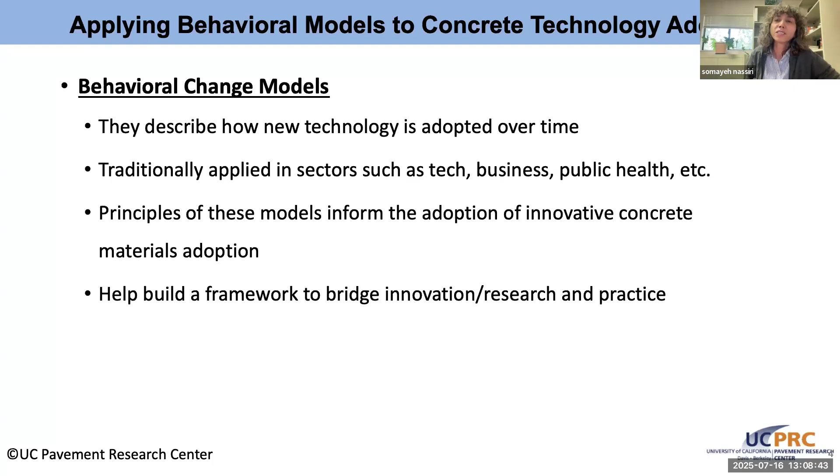As we've been exploring this idea and facing these questions from a broad range of stakeholders, from the producers, from the contractors, and from the state DOTs, why doesn't the change happen already? Why does it take so long? We looked at what is available in social sciences, what psychologists say, what kind of models are out there. I found a few behavioral change models that are applicable to the concrete industry and construction industry, though they've generally been used for tech, business, public health, a variety of sectors, but generally within the tech industry they're very common. We can learn some aspects from their principles.

And help us build that risk management framework. So the first model that I want to introduce to you, and a lot of you may have already seen this, is called the Diffusion of Innovation model.

So this model breaks down the entire population, as you can see on the screen, into fragments of population, and describes how various fragments of population will take on to a change.

What you can see, that tiny 2.5%, those are the innovators who we want to engage first. Those are for us to translate back to the concrete sector - maybe the firms that are willing to take the risk, or have the resources or the culture already, that can take on big projects and absorb the failure if there is any. I would give an example of maybe the owner of Burj Khalifa, or whoever set out to build the tallest skyscraper in the world and take on that risk.

After that 2.5%, we want to engage the larger early adopters. And then what you see on the screen, there is that chasm - that gap that technology or the new material or any innovation has to cross, has to bridge, to be able to then make it to a larger population, 34%.

As I've been presenting this, and I see my friend Mike Smith here from CEMEX also, we've been identifying a second chasm. So we would have a modification to the authors of this model, developers of this model, to introduce one more chasm there that the technology will have to bridge and cross to make it to the late majority. And now the technology's made it through the majority of the population.

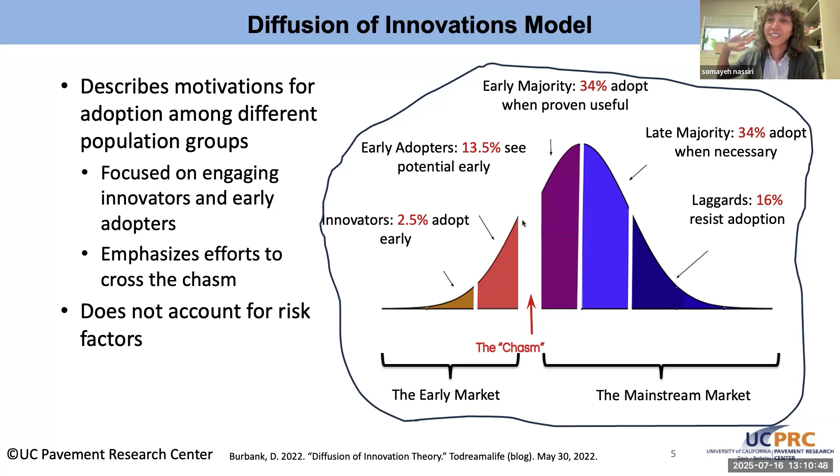I was presenting this framework to another group, and somebody brought up a really good point - they've been working with the school district, and they are unwilling to take on coal fly ash in their concrete mixes. That reminded me that there is always a small portion, 16% of the population, that just would not take on to that change. And that is okay - that's just the cross section of the population.

So the next model that I found quite relevant to how we perceive change, or what are the barriers that we see, or what are the different steps for why or why not an agency may adopt that change, that particular technology.

This model, UTAUT - you can see the reference at the bottom if you want to read more about it - but it's summarized in this flowchart. Let's start at the top.

The first item is, from a user standpoint, or a firm, or a DOT agency - how would this impact my job? Is this going to be a failure on my record? Is this going to damage my reputation, or even worse, am I going to lose my license for this? Or is my firm going to see some financial losses, lawsuits, and things like that?

And then the second level is effort expectancy. For us in the concrete industry, this can translate to - okay, this material, how easy or how difficult is it to take on? Is it compatible with the admixtures that I already have on hand? Do I need an extra silo? Do I need to make changes to my regular mixing and batching? That would be an example.

Also, what makes it a lot easier for material to be taken on is if there is already a path to standardization or to being accepted as an approved material list. If the path is there already, and you know what tests need to be done, then that effort expectancy goes down drastically.

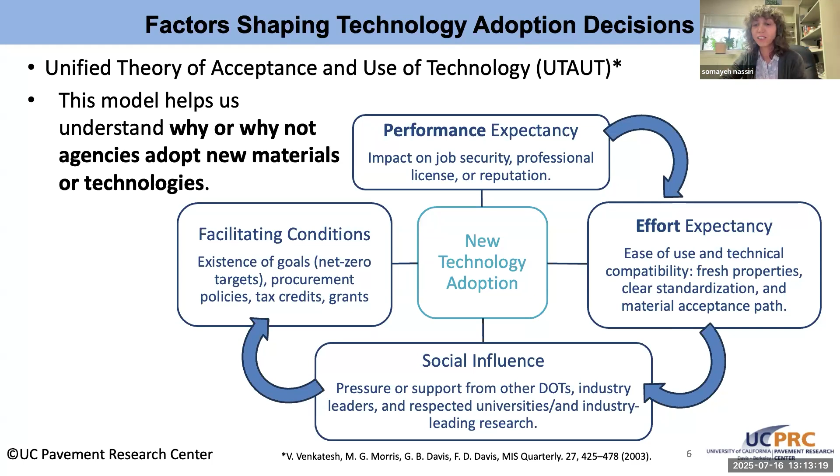And then finally, at the end, facilitating conditions. I translated that as policies - governmental or agency policies like net zero goals that we had, some of the procurement policies that were coming out, tax credits, grants, and funding opportunities. So all of these coming together, I thought that model was a really good representation of some of the barriers and some of the things that may slow that change.

Another model that I thought was interesting was addressing the question within larger firms and even public agencies, those who are in charge of our public infrastructure, like DOTs or federal highways. How could they embrace change?

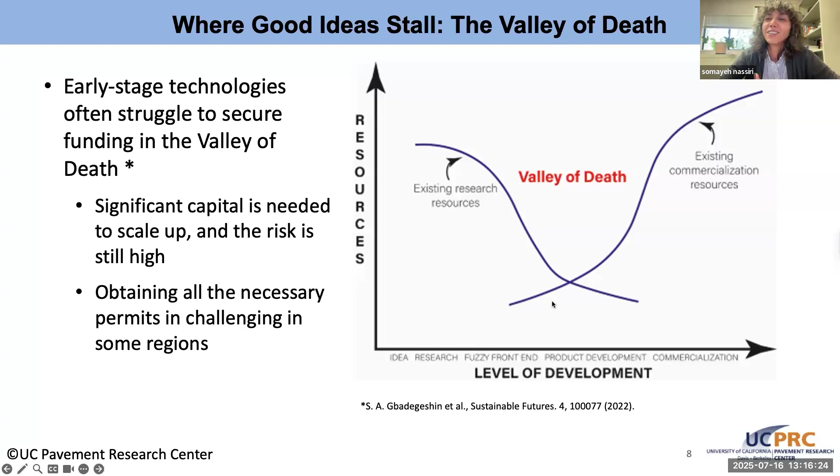What research shows is that somewhere in the middle, all the resources get challenging and sparse, and they call that the valley of death. That's essentially trying to say that is where good ideas could go and stall, ideas can go die.

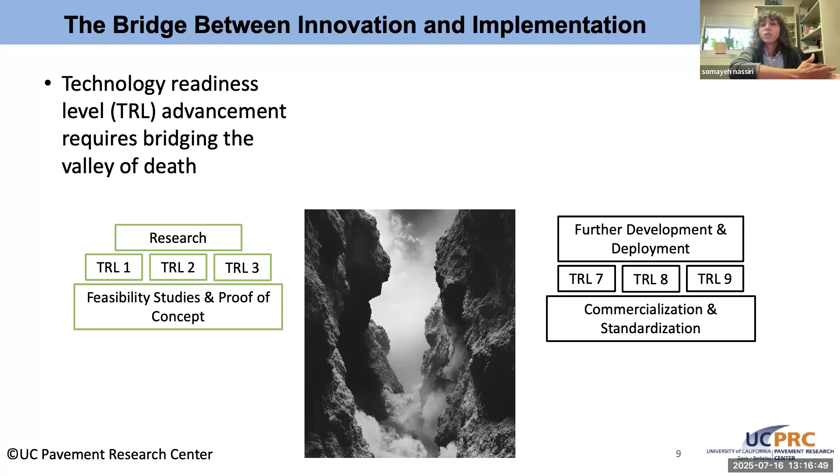The idea here is that a technology would start, and this comes from NASA's technology readiness level, TRL, advancing all the way from 1, early stage, all the way to 9, which is deployment and commercialization and standard practice. So what we're looking for really here is a bridge.

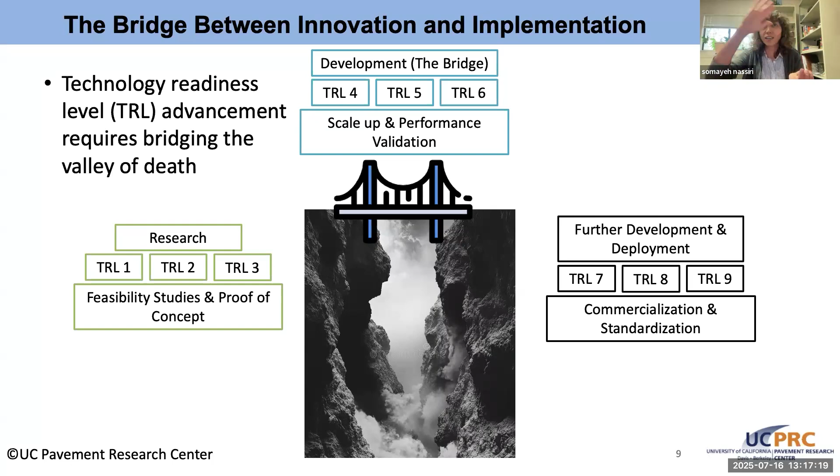We're looking for the bridge to be able to help support development and provide evaluation, validation, feedback, and performance validation, because there are challenges here in the middle that need to be bridged, and those could be funding, scaling up, getting permits, and getting over that chasm to make it all the way to here.

That background brings me to this framework that we want to talk about today, and we refer to it as Lab2Slab2Practice. This framework is designed to help overcome the two valleys of death that we've been talking about, the two large valleys to overcome.

The way we have framed it is really focused right now on evaluating supplementary cementitious materials. This has been work supported by Caltrans, and we've been focused on finding alternative supplementary cementitious materials to coal fly ash and slag. But it's a framework that can be applied to any new materials or any new technology that wants to make it to the sector.

So considering evaluation of SCM, or supplementary cementitious materials, we start off by basic characterization. This includes mineral phases, oxide composition, particle size, thermal activation if anything needed, XRD, XRF, getting all of the pozzolanic reactivity, and then doing cube testing, and then if everything checks out, we advance to a larger scale.

So you can watch my hand. It's literally, we're going from having a few grams of the material, going to maybe 1 kg of the material, and then we're going up to maybe having a bucket of the material.

So we're scaling up. Early on, we want to check environmental claims, and we use this as a screening tool to weed out the ones where the claims don't make sense, check out cost, scalability, and whether we can establish a supply chain for this new material. Does everything check out? If everything checks out in this early investigation, then we want to move things forward.

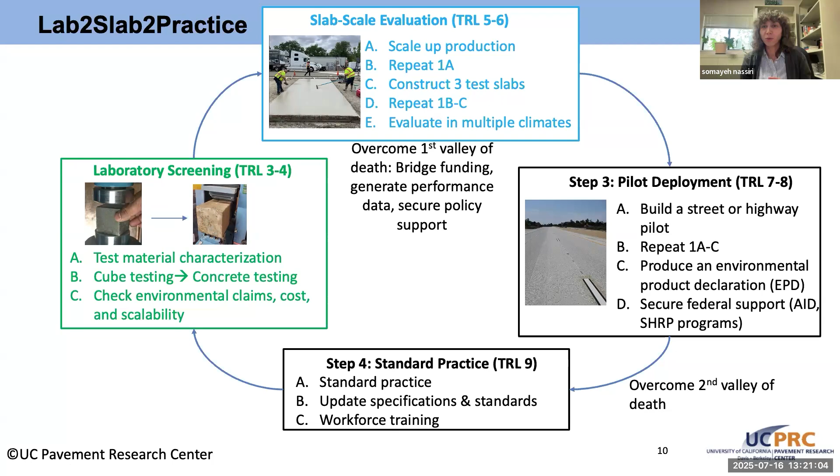So I presented the framework in a theoretical manner so far, and I'd like to give you some examples as we go through this. I'll come back and touch on a few programs that have also implemented those. So we're going to go through an example implementation of this framework.

I'm going to use natural pozzolans as an example. I don't know how many of you are familiar with pozzolans, but these go back to ancient times, to Roman times in fact, when they used to make concrete or concrete-like substances with volcanic tuff. They called it pozzolana, and that's where the whole story began. We still have standing structures from that time that have withstood the test of time and proven durability.

Coming to modern construction, we've also used pozzolans across California, where we've had pumice deposits. It was discovered - today we call them Caltrans, but back then the highway agency employee Stanton demonstrated for the first time that pozzolans in California can mitigate alkali silica reaction, and they're a very good additive for concrete. We have a lot of public heavy civil infrastructure, like dams in California and the western area of the country, that have pozzolans and pumice-type materials in them.

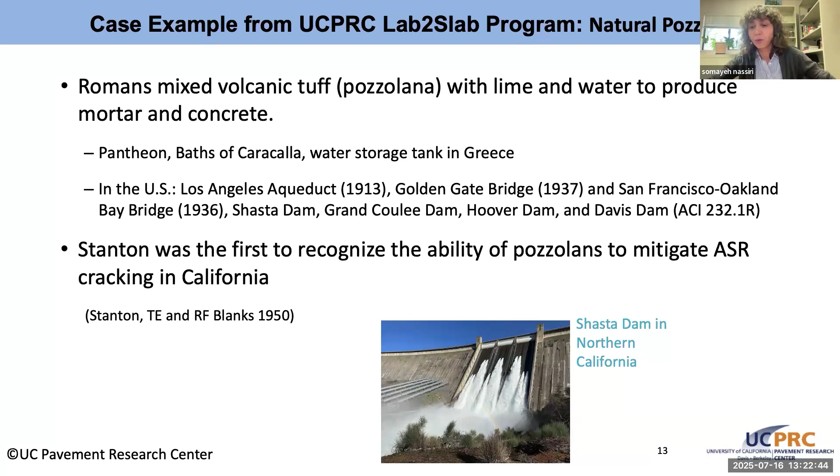So now we want to go back and see - look, we're low on coal fly ash, we're low on slag potentially, until we want to diversify. We want to have various types of additives, supplementary cementitious materials, to use in concrete.

So if we go through that framework we talked about, the first step, if you remember, was characterization at the laboratory scale, needing just a few grams of the material. As it is with the binder portion of the concrete, we need that surface area. A lot of it comes down to activation, whether mechanical or thermal activation, and the characterization has to be done in terms of mineral phases, surface area, fineness, all of those.

And then what we put a lot of focus on is the pozzolanic or latent hydraulic reactivity of the material. These are tests that can be done on a very, very small amount of the material, yet give us a significant amount of information to screen these materials early on. We can do small scale cube testing to look at strength, but also look at water demand, which is a very important aspect of these additives.

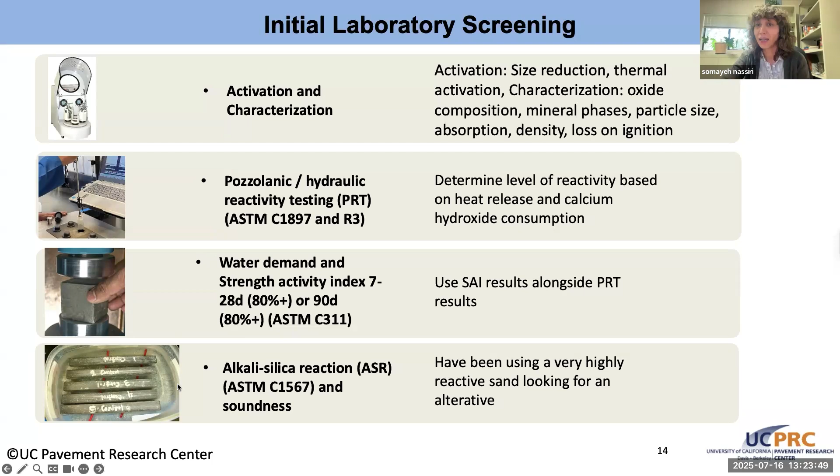As I go through the presentation, I cherry picked one of the first materials that we put through this whole feedback cycle. This material was produced for Purebase. They produce metakaolin mixed with a silica type SCM. It is produced locally here in California, in Ione, California.

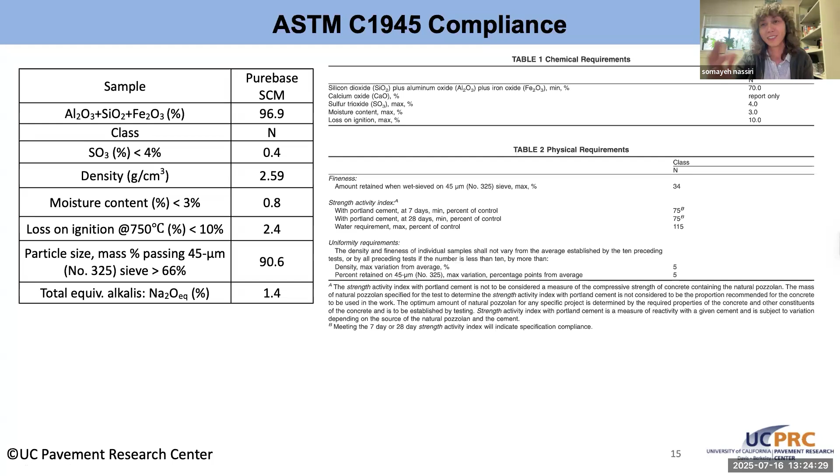Everything started, like I said, with the characterization of the essential oxides, looking at density, moisture content, any carbon or organic matter, particle size, everything checked out. So we did the first level of screening, looking at alkalis and all of that, and progressed to looking at the results of pozzolanic reactivity.

What we really like to look at in this graph: we place a little bit of the material in an alkaline solution and look at how much heat is released in isothermal calorimetry over 7 days, and that's what you see on the y-axis. Then we also take that paste out after 7 days, and we measure how much calcium hydroxide is consumed in that sample by thermogravimetric analysis. We plot the two together.

We've tested so many materials at this point that we've come up with boundaries and boxes for how to label the material. We've also checked that with some of the work available in the literature, and the boxes kind of match up. So you can see that Purebase material we're using as an example today falls in this middle area, which we like the material to fall in, pozzolanic.

What we call them less reactive versus this area is where we get a lot of heat, and those are the super uber reactive materials. We're not necessarily looking for overachievers. We're looking generally for materials to be in this area.

And then some of the other materials may be latent hydraulic, which fall in these other boxes. This box down here is our reference for an inert material, which is just ground up quartz. So these are the materials that are not pozzolanic and would not yield any of those additional benefits that we get from pozzolans, like additional calcium silicate hydrate or calcium silica aluminate hydrate, and all of those things that add durability to the concrete.

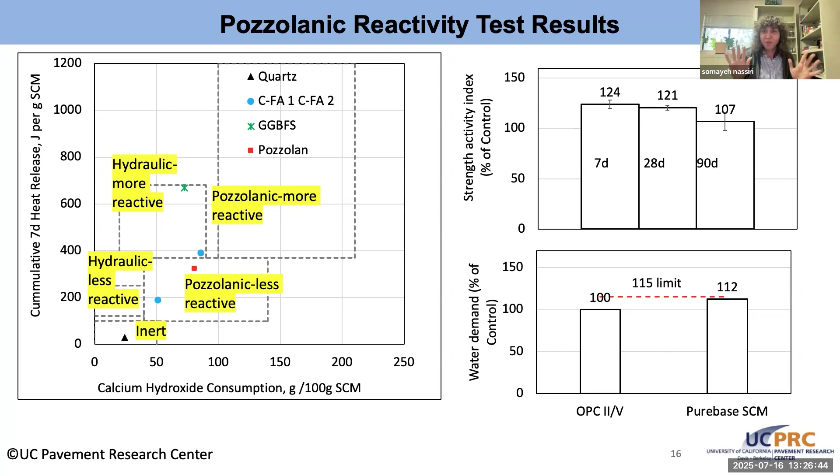We also keep an eye on water demand, making sure that all of those capillary pores that want to suck water from the concrete, we fill them up, and the material is happy with the amount of water that it has received, and that we can incorporate it into concrete.

Foam index is something that... okay, so then we finished that first round of the screening, and everything checks out, then now we are scaling up already from about a bucket or a couple of buckets of the materials.

So we are working with the supplier at this point to scale up with them, and we're trial batching concrete at this point. So for the materials that are a little higher in carbon content or organic matter, we want to look at compatibility with air entraining admixtures for freeze-thaw durability.

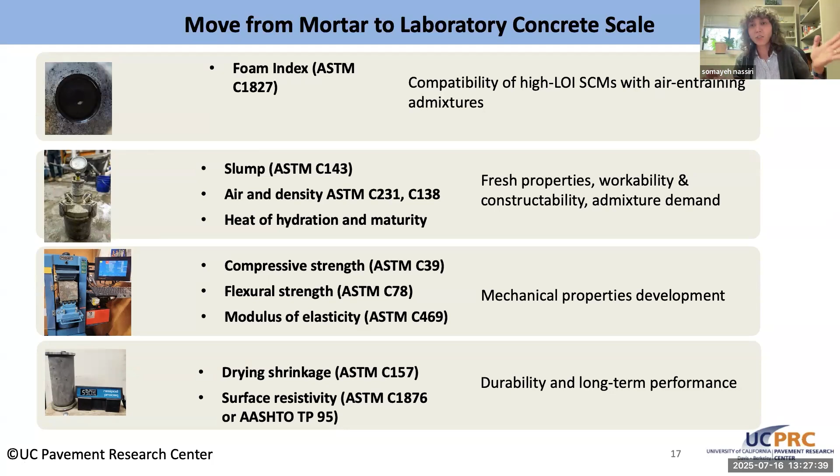We'll look at a full range of fresh properties, hardened properties, and also some indicators for durability. Drying shrinkage is really important for us in pavement applications, so we always keep an eye on that. Surface or bulk resistivity testing is something we've been using as a proxy for durability evaluation. It's not a direct evaluation method, but it's a proxy.

Back to our example case material here being Purebase, we use a control. Here's our trial batching, this is our concrete mix design. We look at admixture demand here, incorporate a couple of water reducing admixtures, and that is one of our areas of focus: water demand, admixture demand, while making sure durability and cement hydration are in check.

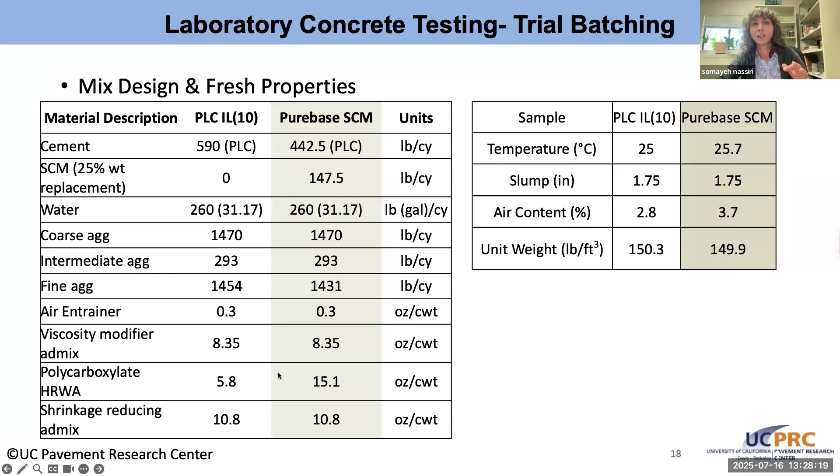These trial batches really help us narrow down and finalize our mixture formulation, looking at some of those fresh properties and trying to match target slump, target air, while finalizing and verifying admixture demand. Then we look at a host of mechanical properties, and a lot of our work, as I mentioned, is for Caltrans.

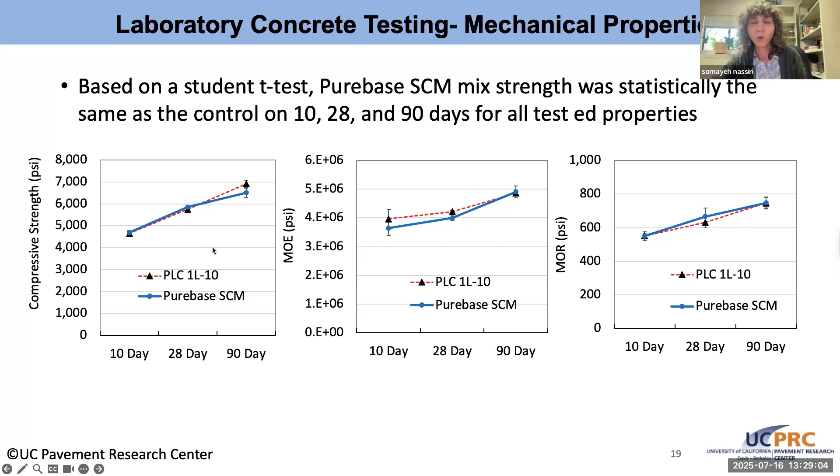So we always keep an eye on making sure that the material, if they want to be on the approved materials list, meets the acceptance criteria for drying shrinkage and mechanical properties, specifically flexural strength for us in the pavement area, modulus of rupture. We're also keeping an eye on modulus of elasticity, not something we're quite used to in the pavement field, but it is important. And compressive strength, which we're all very used to seeing as a quality control measure for concrete. Everything checked out.

So we are progressing, looking at some durability indicators. Blue is our case material here. This is the result of electrical resistivity, bulk electrical resistivity, showing very good resistivity against the flow of electricity through the sample, generally indicating that the pores are isolated and not connected so current can't flow through. But it is highly impacted by the ions that come along with the material into the pore solution, so we've got to keep an eye on that.

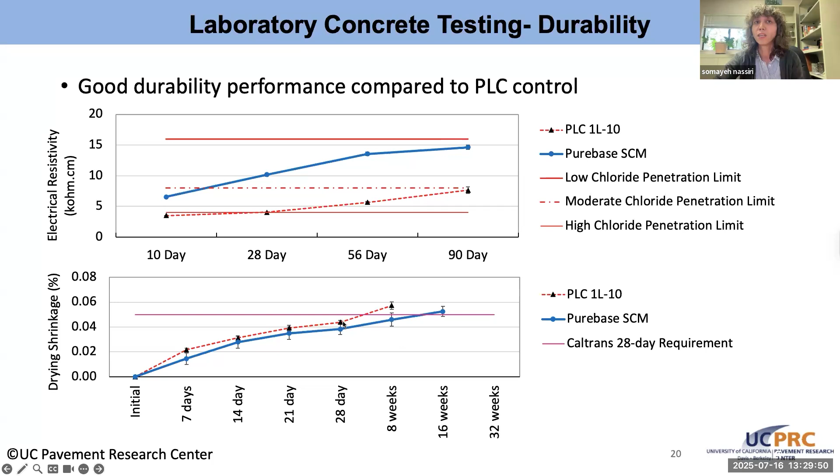And then drying shrinkage is one of those important factors we keep an eye on. Specifically, Caltrans has an acceptance criteria that needs to be met on the 28th day for drying shrinkage. So we keep an eye on that, and it's a very important criteria for pavement performance.

Okay, so let's say everything checked out at the laboratory scale. Then we work with the supplier to scale up and produce a super sack, or one or two super sacks of the material, depending on whether the material is cement or an SCM. So they will need to prepare the super sacks and deliver them.

We have a really good partner in Central Concrete, and they produce the concrete. So we work together as a coalition, come together and put our heads together on how we can put the test material in the truck and batch it at the plant.

We do full scale trial batches a few days before the actual construction, focusing really on water demand, admixture demand, getting all the kinks out. We don't want any surprises on construction day, although it's not bad — we are not afraid of failure. I should bring that up again.

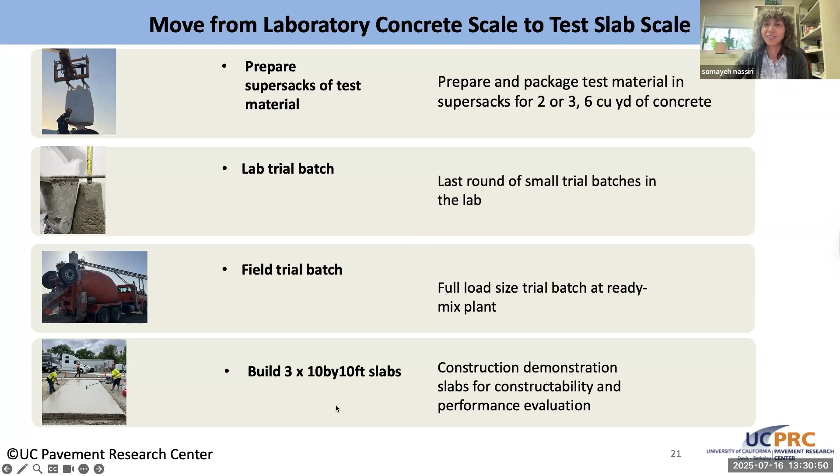So then comes the construction day, and we build 3 slabs and really evaluate constructability. So let me give you an overview of our facility.

This is an aerial view of UCPRC at Davis. And what I've highlighted in the middle, the series of what we call test cells, are actually located over here. I should have marked that with an arrow, but hopefully you can see my cursor. This is where we have one set of test cells, and we're planning to mirror those depending on demand up on the north side as well. You can see the forms going up here for that. This is the control that we paved, and this is the test cell, the case study we're discussing today.

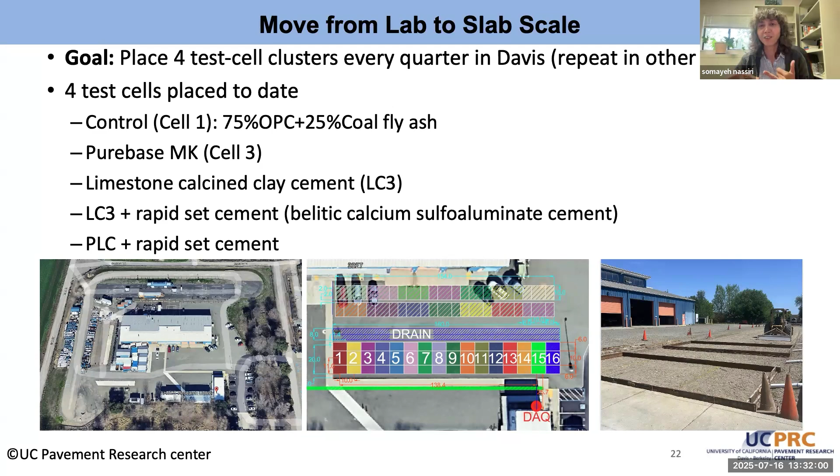We have so far placed 4 test cells, and we've planned for another 4 upcoming soon. We're hoping we can keep the momentum going, placing 4 test cell clusters at a time every quarter. That's our plan, and we're hoping this whole framework can be repeated across California, but also across different regions of the United States and then internationally, to get the climate effect and also the aggregate and local materials validated.

So for each one of these test slabs, we put a strong emphasis on mid-range and long-range monitoring. In order to do that, as you can see, these trees are basically strain gauge trees, blown up here, and they're relative humidity sensors and temperature sensor trees. And these beams you can see over here are unrestrained drying shrinkage beams.

The goal of this is to track drying shrinkage. As you can see, concrete slabs tend to curl upward as they dry more at the surface compared to the bottom. This happens because the slab wants to pull itself back down, and because truck axles along the joints of the slab ultimately exacerbate cracking across the middle area of the slab. So we're trying to monitor all of that curling and warping that may be happening across the slab, and with these companion beams, how much restraint from the weight of the slab and from adjacent slabs influences the cracking and damage that may develop over time.

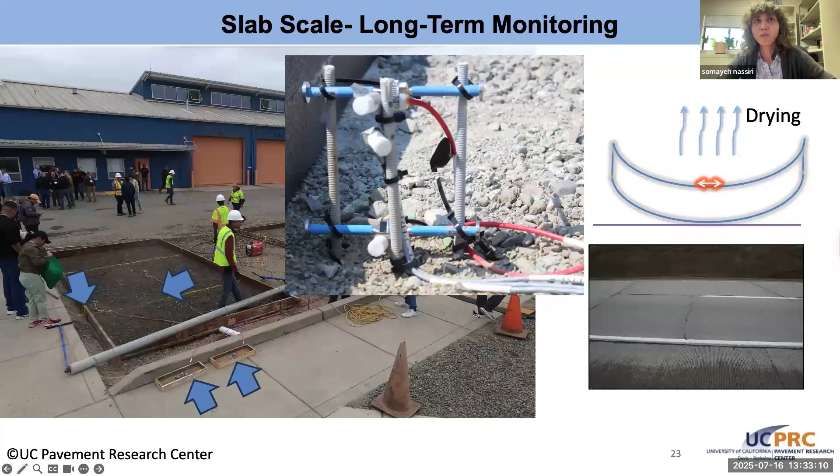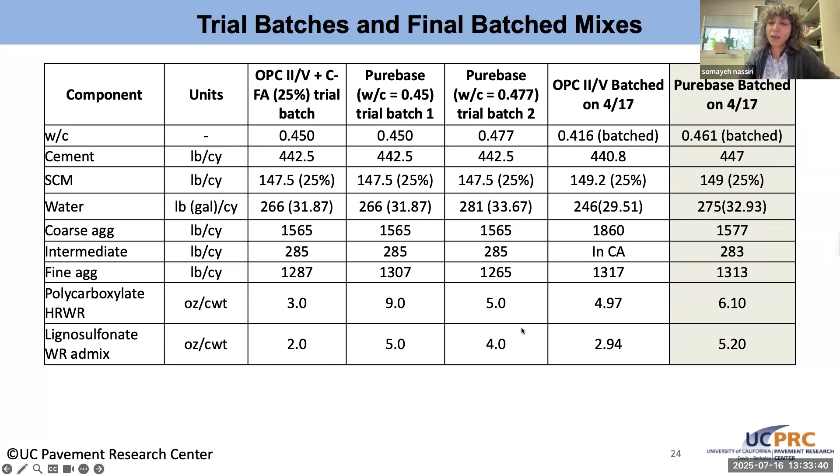I understand there's a lot of values in the table, but what it is intended to show is that we do quite a bit of trial batches. This is the control trial batch, and these are a couple of trial batches we did with Purebase, full scale, in the ready mix truck. These are the ones batched on the construction day, really focusing on admixture demand and water demand, making sure we were prepared.

These are photos from the construction day. We focus a lot on measuring the bleed water, measuring constructability and finishability. We verify the water and admixture, and then do full-blown quality control testing for fresh properties, mechanical properties, and durability. The goal of this is full assessment and evaluation, and as we're doing this we're addressing all of those risks with stepwise testing.

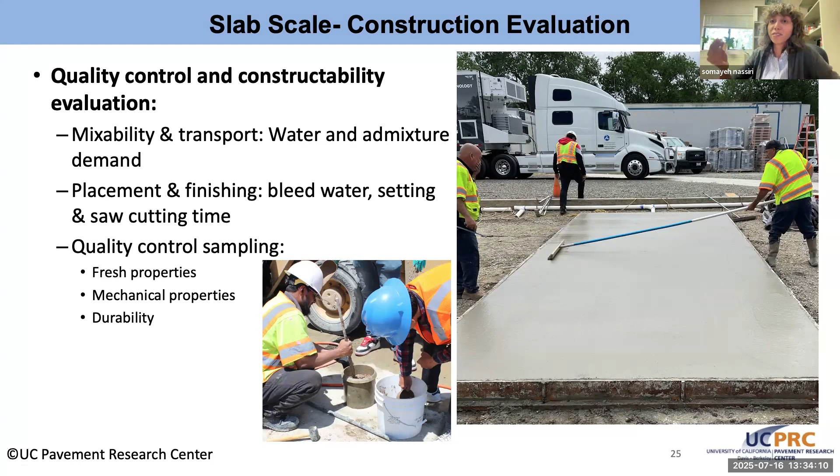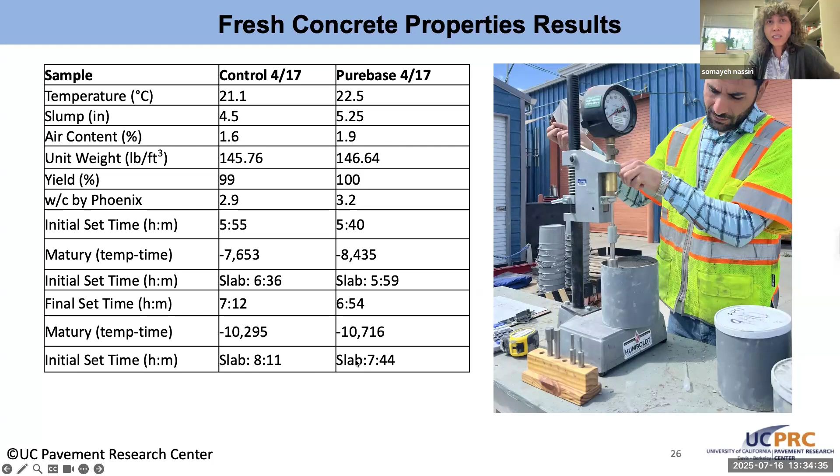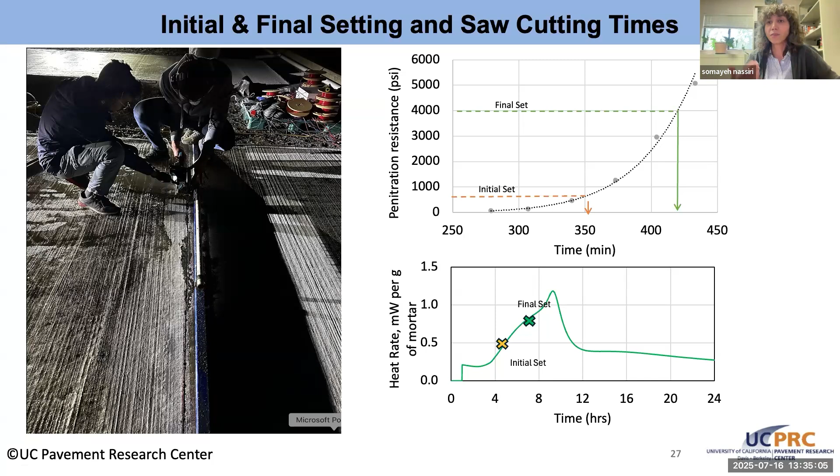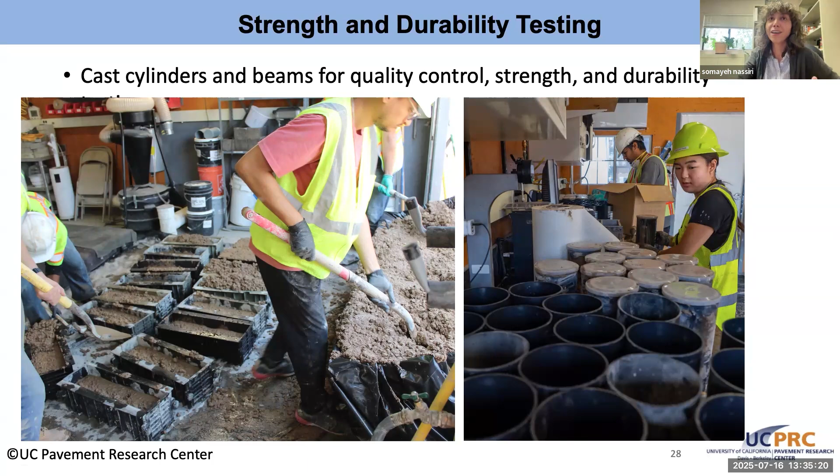On the construction day we also cast a series of specimens, with the goal of full quality control and monitoring of mechanical properties and durability, basically checking if everything conforms with the previous steps of evaluation.

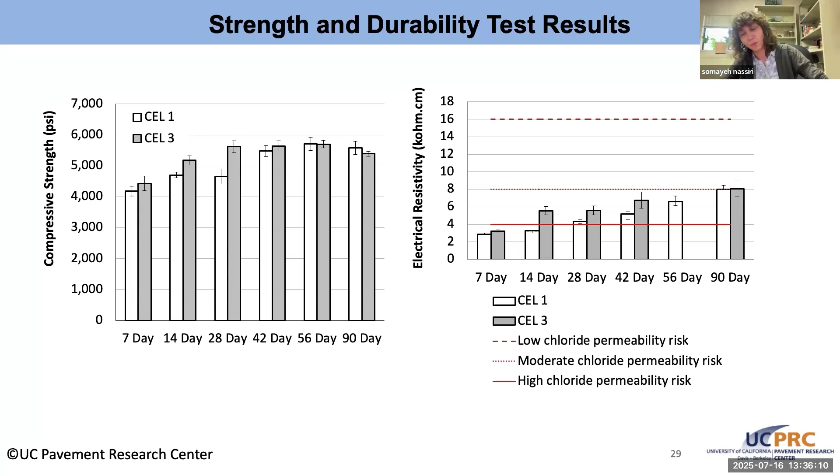As we review these test results, we want to think about that framework as a feedback loop. If we identify areas where improvement is possible, we want to be able to go back a step, or if not, go forward a step toward agency deployment in pilot projects.

Some of the additional materials in the pipeline coming up for Lab2Slab evaluation include optimized concrete mixtures with supplemental fines, which can include rock dust from aggregate production. These are industrial byproducts that we have in abundance but with very low reuse or recyclability. These are baghouse fines collected as part of asphalt production as the aggregate is being heated.

Other resources we have abundantly available, primarily in the western United States, include diatomaceous earth, ground glass pozzolan that we're working on with a supplier, wood ash, and all kinds of biomass ashes — particularly important for California: wood ashes, almond shell ashes, almond hull ashes, as well as rice straw ash, which is something we've been working on recently.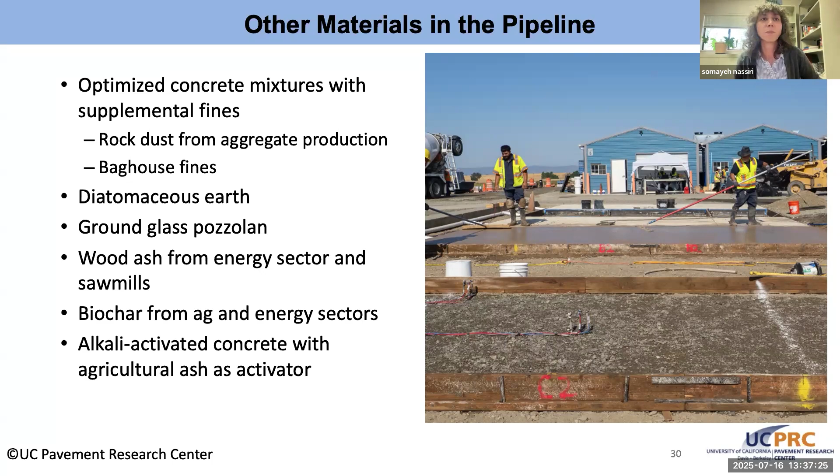Biochar is something that has come up quite a bit, and we're looking at it for incorporation in concrete, as well as alkali activated concrete, as these represent alternatives to using Portland cement for producing concrete. As we go through this, and having showcased how we've implemented one pozzolan so far in this presentation, I want to highlight that communication strategy is also key to overcoming and bridging the valleys we talked about.

So just some photos from the event. Every time we do these constructions we like to invite a broad range of stakeholders, and we think this provides a really good opportunity for everyone to informally network, exchange observations, and see how the material is placed firsthand.

Training is a huge part of this, and we've learned lessons from recent implementation of cementitious materials. Training of the workforce is a key part of this, and we want to play a critical role in it. The framework and those valleys cannot be bridged without proper training of the workforce that puts the materials down and implements it, and also the designers and specifiers who specify the material in their mixes.

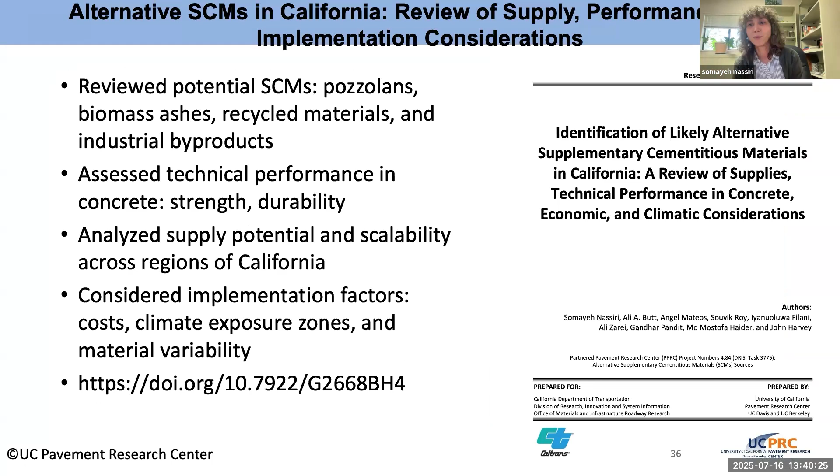Here's another example report focused on a comprehensive literature review we did to identify various alternative supplementary cementitious materials that could potentially be implemented within the concrete industry. Again, the address is down below if you're interested.

So just to wrap up and recap some of the major takeaways from the talk: we discussed that we need to accelerate the pace of change, but we also need to be open to change and to applying improvements. We've got to overcome and bridge those valleys of death.

with performance data, with effective risk management frameworks, and with stepwise testing, helping the technology and innovation scale and be adopted across the entire population. It's important that we check environmental claims, market acceptance, cost competitiveness, all at early TRLs, but also keep an eye on their progression as the material or technology gets scaled up.

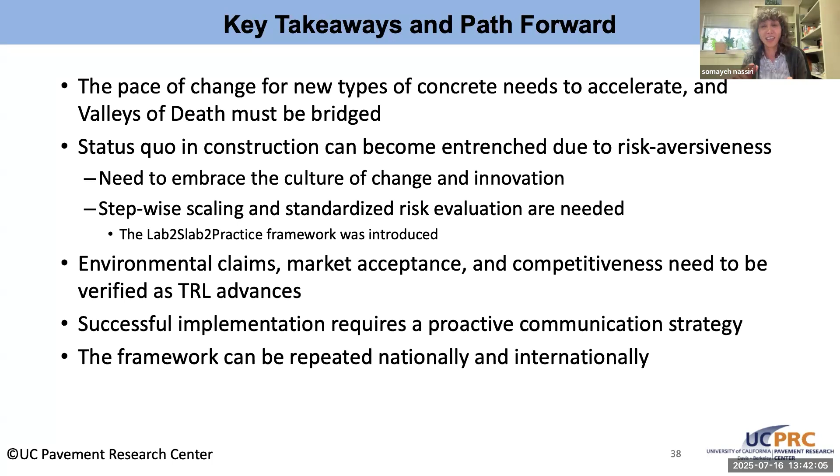Proactive communication and strategy is key. Reporting is key. Sharing performance data is key. Developing standards and workforce training is key. We hope this type of risk evaluation framework can be replicated across various materials and climates in the US and internationally, to help accelerate the pace of change across our industry. It was a pleasure giving this talk.